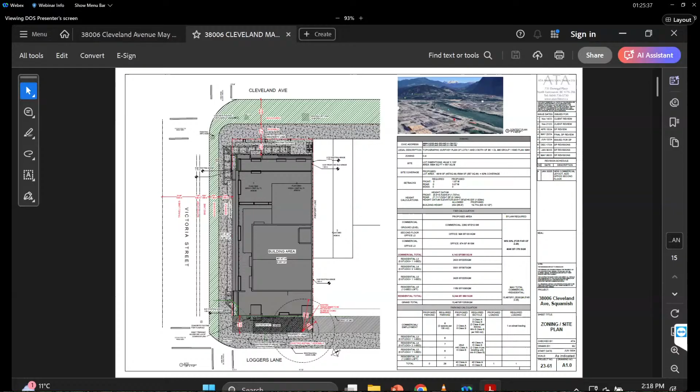Thank you, and hello, everybody. Thank you for your time coming again. So the biggest changes that we've made are to the elevations. So I might just shoot over to those so you can get a good sense of the Cleveland streetscape and the Loggers Lane.

Previously, where we had the large concrete look wall, we've carved out two areas now. The first one is where there will be balconies and patios for the residential unit. The second one is just to provide a break in the large wall. As we carve into that concrete, we're revealing wood, so it'll be the same fir wood siding with the clear finish. We've also changed the canopy along that elevation to glass, and pulled it away to just cover over the commercial patio area.

On the Loggers Lane side, we have a similar treatment to the concrete wall, where we've pulled in slightly along here and added the wood finish, and also carved in here for the patios, as each of these are residential units. I'm just going to shoot back now to the ground floor site plan.

We did some changes to the back, the Loggers Lane side, because there had been a few comments in that area. So the first is we've taken the PMT and pushed it over as far as we could without greatly changing the floor plan. This gave us the opportunity to bring the commercial space all the way back and mirror that same angled view plane cut along the ground floor. It did have us bump up some of the bike storage up to the second floor, but we had the space and it just made sense.

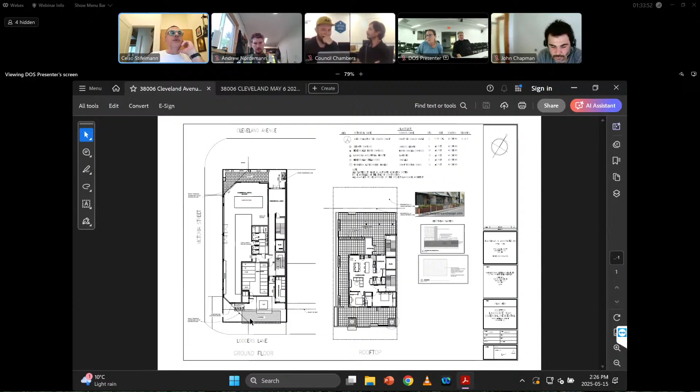Hi, so questions. On the renderings, you show some shadows on that window frame with a bit of lighting. Is this because that frame is going to be offset or spaced away from the facade, or is there an LED or something like that? For some reason, when we rendered it, that kept showing up, and when we removed the shadows it looked too flat, so we put it back on, but we didn't have time to figure out why it was also showing a bit of light there. It is not the intent to have LED lights there, or to have it spaced away - that's a rendering issue.

Yes, just that line of light by the windows, all the windows, it appears, is a rendering issue. I don't have any further questions. Thank you.

Okay, thanks. Also, Michael? Hi there, yeah, had a few quick questions. Can you just confirm that the planters on the residential units' balconies are not planted as part of the project,

but will be up to private residents to plant themselves? Yes, that's confirmed. Do you know what the slope of the patio is? I note that the slope at the entrance on Cleveland is 5%. Is that also reflected in the patio?

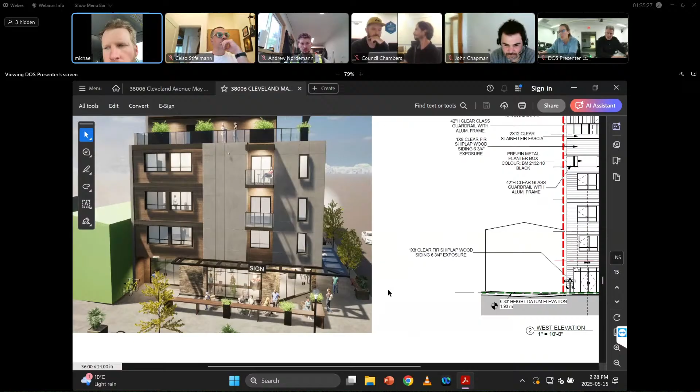Do you mean the patio on Cleveland? The commercial retail market patio, yeah. Yeah, no, let me zoom in and see. I don't think that would be 5%.

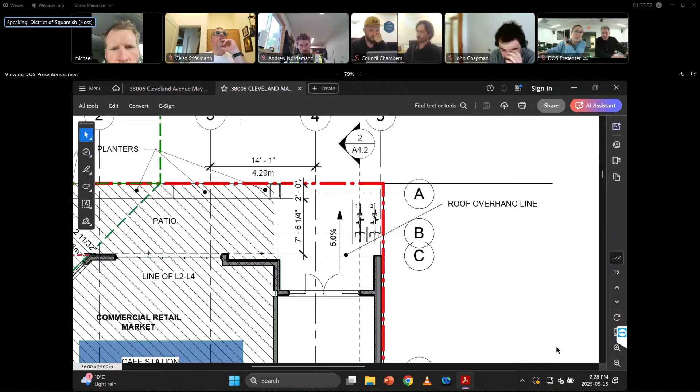Initially it would be here, and then it would slowly slope away to meet with what the street level is. So that will be worked out with our civil engineer when we get further. But it'll be under 5%? It would be no more than 5%, but we would prefer to have it less.

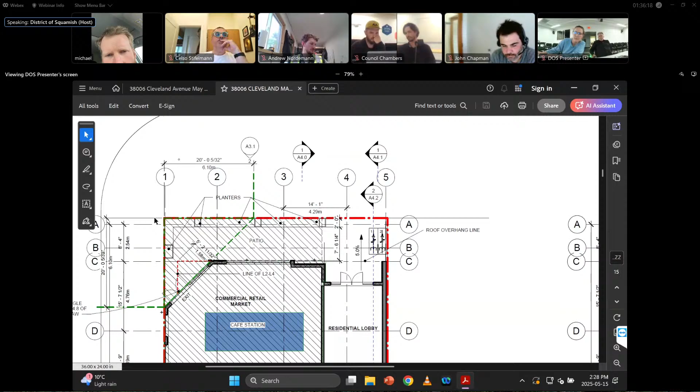So this side here, at least on the existing sidewalks by the residential entry, is where the lowest elevation was. And then it slowly goes up, and along Victoria as well, it starts to go up from there. So this point here where the residential entry is was the lowest point.

Okay, and then on the Loggers Lane end, the exit of the residential lobby, it kind of goes down at 2% and at 4 point something percent. So there's a low point in that corridor, the exterior corridor. Yeah, so that's the exterior.

We're going to have drainage there that the mechanical will work out, but we wanted to have 2% or so away from the building in case water does get in there.

And then the Loggers Lane side is actually the highest elevation. So that's why we ended up having the 4.8% grade to try to meet it. But those numbers will be adjusted as we work further with the civil engineer, but we'll stick within the required no more than 5% in the direction of travel and 2% for cross slope as typically required.

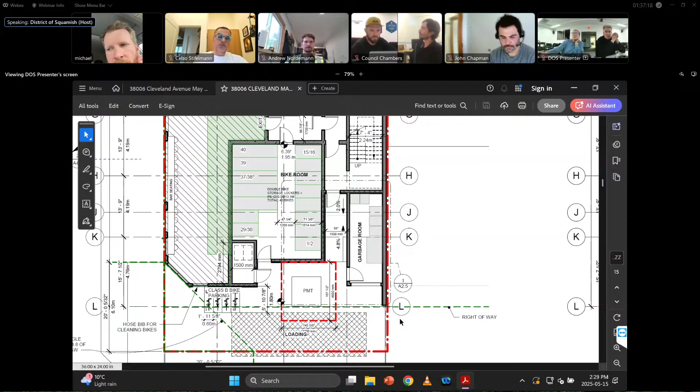Okay, and then in the renderings, back to the commercial patio space, it looked like the seating, what's labeled in seating on the plans, in the renderings looked like it's more table height with people sitting in chairs at that table height. Can you confirm if it's seating or used more as a...

We had originally put seating, and then we happened to get coffee down the street at the donut coffee shop — I'm blanking on the name — and they had a table level height, and it was just so lovely. So we were trying that out here, and I think it really works well because then people can sit up and use that as the table.

Okay, thanks, I don't have any more questions. Great, unless someone jumped on, I think that leaves me. So my first question is to you, Bryan.

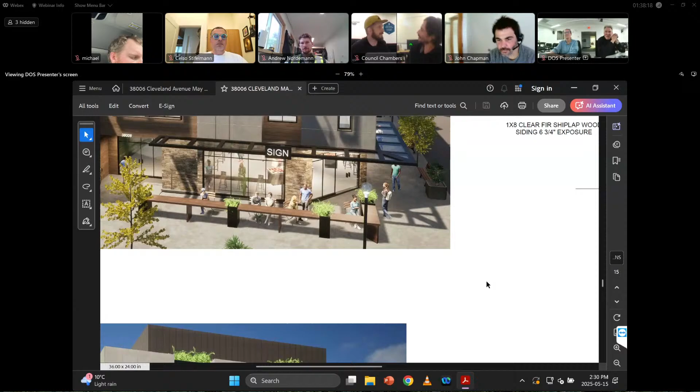What's the status of the BCR strip acquisition around Loggers Lane? I do not know the answer to that question. I will look at my manager to see if she knows the answer. She also does not have the answer. My apologies. You are forgiven.

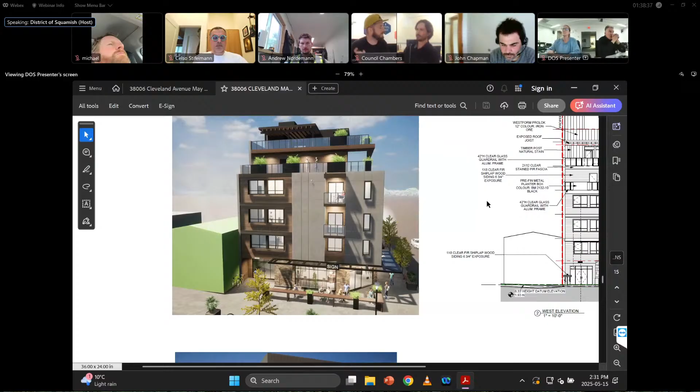Okay, and the second question I had was just around your comments on Victoria Street. I looked at the streetscape standards, and so it'll be a bike lane on either side. So that's integrated into this plan, obviously. Yeah, we're aware that that's what the streetscape standards will be. And because the civil engineer hasn't done those accurate drawings yet, we just roughly put what the spacing was.

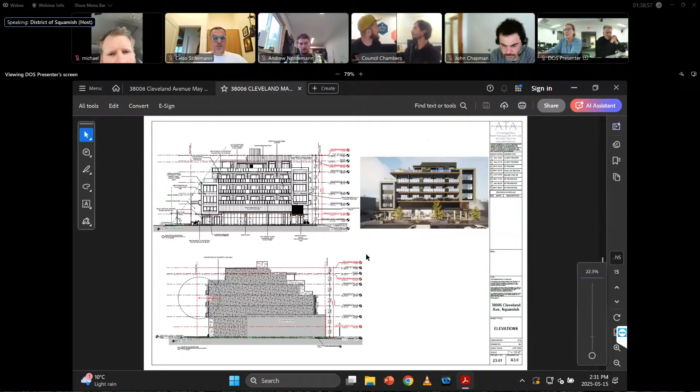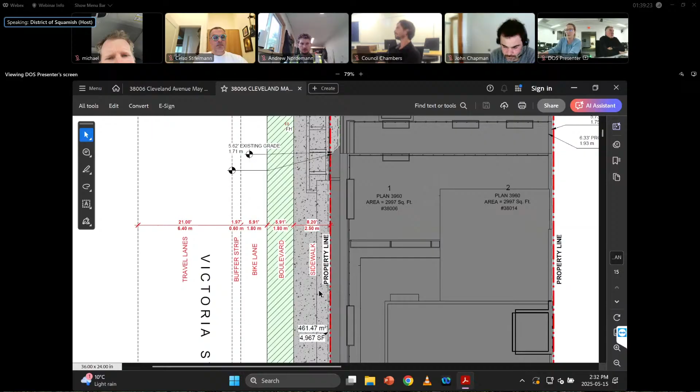So, oh, that was too much. I don't know if you can — yeah, so we sort of had the sidewalk that's wider and then there'd be the bike lane. Maybe we show it better here. There, so what we show is just the approximate — let me slide over those distances. So you have the travel lanes, a buffer strip, the bike lane, the boulevard, the sidewalk. We show those in different colors for you to get a sense of how far out from the building that will be.

Okay, and can you just remind me the number of bike parking spaces versus units? Yes, so there's 20 units and we can accommodate 40 bikes, so we'll have 2 bike storage spaces per unit. And that's just the Class A parking. Then we also have for the commercial area, 2 Class A.

And then the Class B parking, which is outside, we need 6. And on this one, I actually show 8 because there's space up at the front of the building. And I figured we'd work that out further with Bryan in planning to see where they prefer to have those, because we could have a few up front and then the rest at the back.

Gotcha. Okay, so we will switch now to comments.

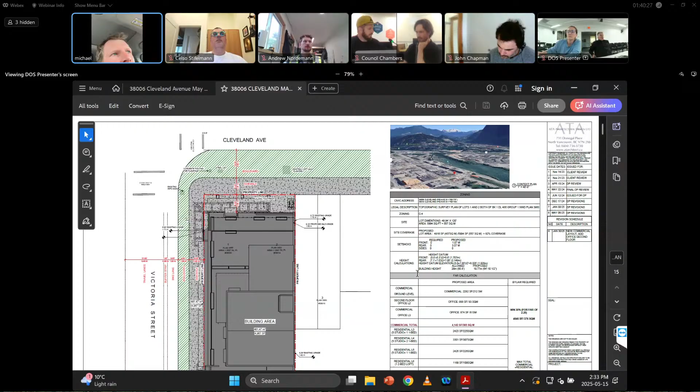I have one more clarification question, sorry. In the active transportation design that's the issued for tender set, the boulevard space on Victoria shows no trees or furnishings, it's just a sod boulevard. In the renderings shown here, I see trees and furnishings, but those are not actually part of this design we're talking about now, so I guess this might be a question for the district. Am I understanding correctly that there are currently no furnishings or trees in the boulevard of this block?

Yes, that's correct. Whatever the design drawings that are issued for tender, I believe that the district may be open to accommodating trees as part of a development project. But as the project work that we're undertaking ourselves is not including that. Okay, thank you.

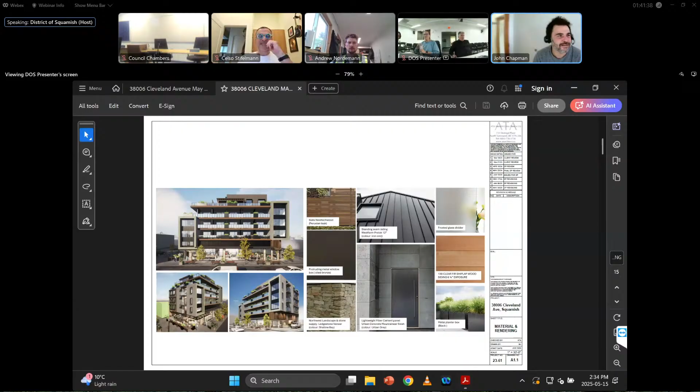Thanks, Celso. Yeah, so definitely appreciate that the designer made some effort with the Cleveland facade. Adding the glazing and decks and so on is a good start. That very blocky vertical element in the middle is still fairly obtrusive. That's such a high profile location. I really think this corner deserves more effort on the design there. It's a really significant new development on Cleveland Ave, and it'd just be a real shame to build something that isn't really fantastic there.

In terms of a residential building with no parking, I think it's a really interesting idea and something that we need to move to over time. I think that for a project to move forward with no parking, it really needs to be very well thought out and have really progressive thought towards vehicle mitigation and parking, or loading and drop off, and the operational requirements. And so it just feels a bit lacking. I think traffic, like vehicle demand management should be a bigger piece of that variance request that this project is seeking. So appreciate that some efforts have been made. Still feels like it could be a little better.